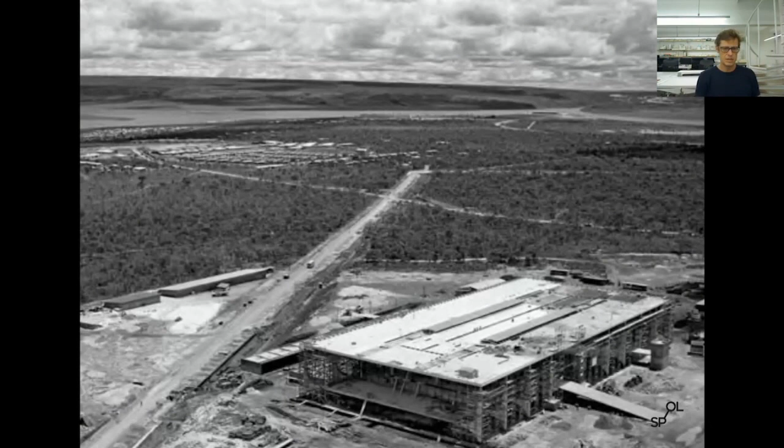Here we see an example of Brazilian architecture, by Oscar Niemeyer. This is Brazil, this vast plain with singular objects signaling in the plain, with very little connective tissue between them. Really beautiful, fantastic objects, world known, but that creates this problem: the dream of Brazilian architecture is exactly this, and everybody expects the architect to design architecture in one night, just like Oscar Niemeyer did. So Brazilian architects have very little time to work and design, because they're used to architecture being produced overnight.

It's kind of non-stop. But I believe if we zoom out a little bit, we see that in the long perspective, Brazil is growing, Brazil is getting better. But day to day is really stressful. We have to, as architects and urban planners, take a bigger picture, a longer perspective on this.

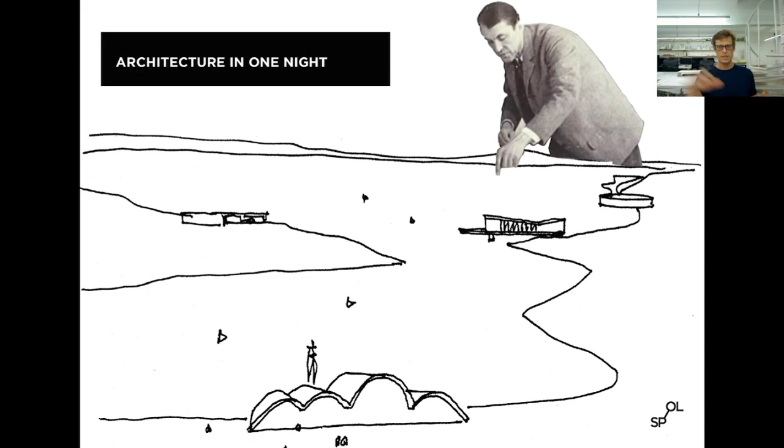Brazil used to be at the forefront of modernism, with fantastic projects by Lina Bo Bardi. But there's this problem - these are the projects that Oscar Niemeyer designed. This is his first commission, which he designed in Pampulha, where basically the mayor of Belo Horizonte called him and asked him to design these things, but said he had to present it the next day. So he went back to his hotel room and drew all night, and presented the next day this famous building, which afterward led him to design Brazil's capital, because of this. So this was really the groundstone of Brazilian architecture - architecture is something you do in one night.

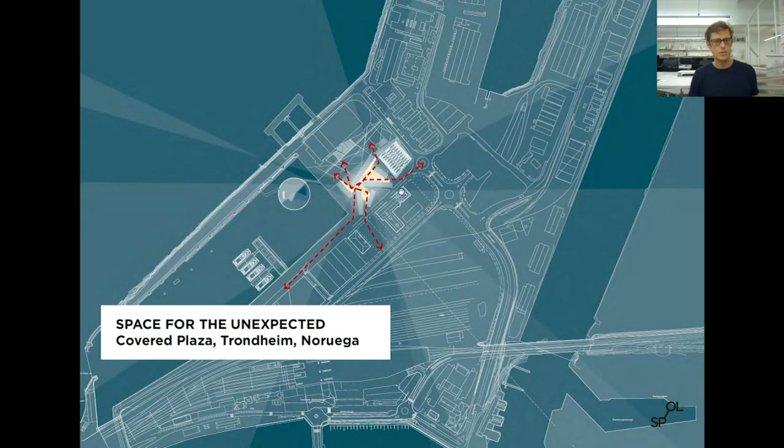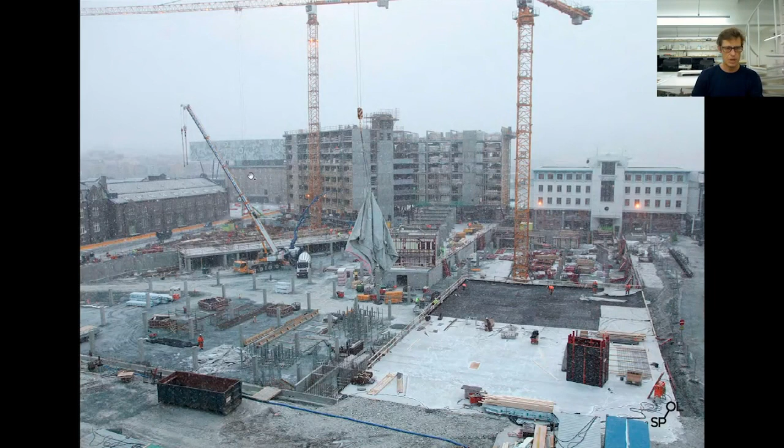It's extremely cold, so what we did is we made this big covered space by breaking up the hotel. We made a big covered space which, in this harsh winter, people can walk through to use. Even though it's a private space inside the hotel, they can use this as part of the route in the city. It becomes a public space paid for by private money. Here's an image of the hotel, referencing the Lina Bo Bardi bridges from the Sesc Pompeia here in Sao Paulo. But you see basically this covered space is working as a plaza in the city.

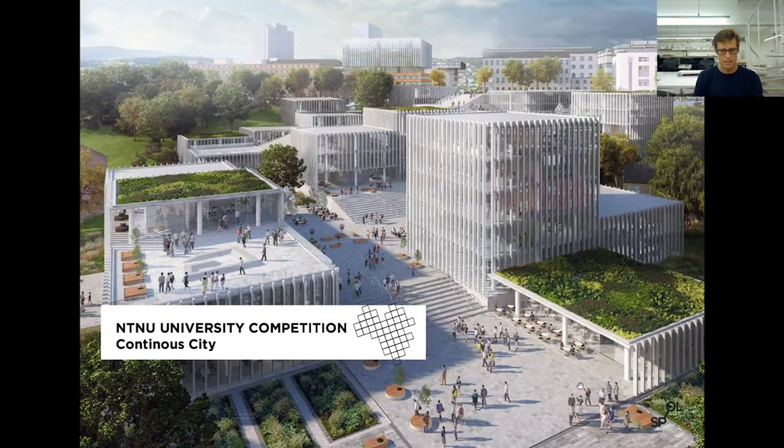The university campus here, also in Trondheim — the idea is that the university campus becomes a tissue, so instead of being a building, it becomes a series of public spaces that connects the top part of the city to the lower part. So instead of being just a private university building, you can actually invite the entire city to pass through the university and use this building as part of the circulation in the city.

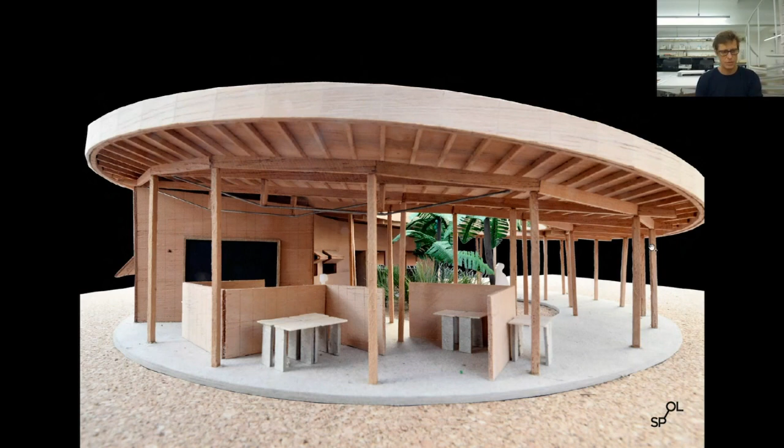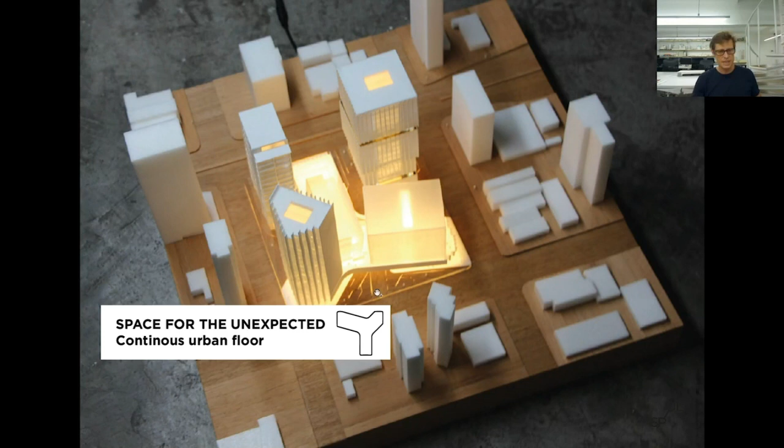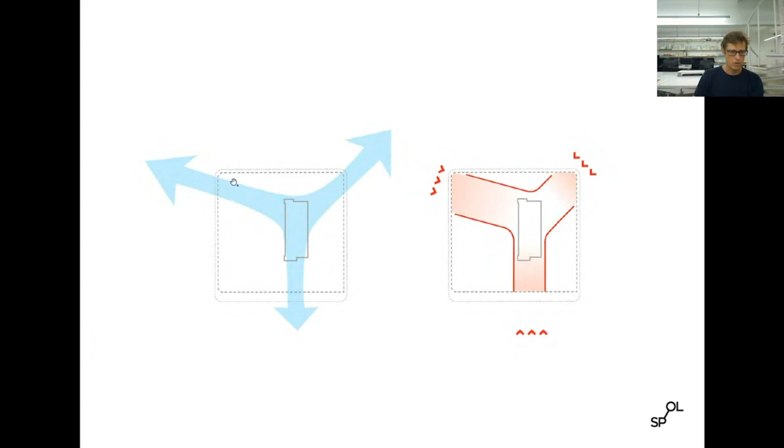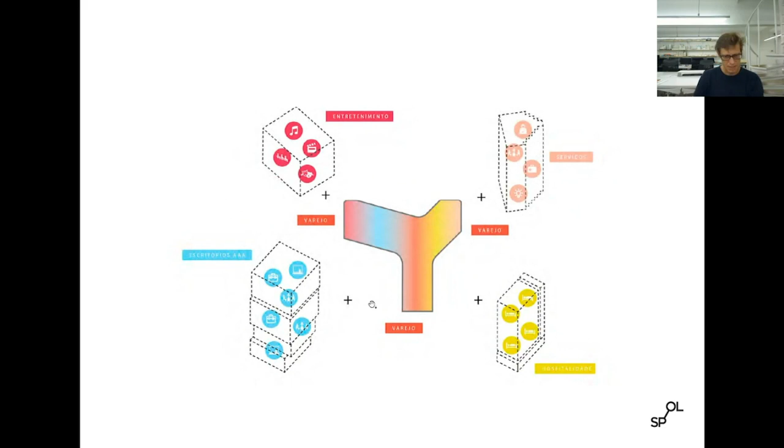Here's the model, and here's the school under construction. And here in Sao Paulo, it's an entire city block where we're suggesting a mixed-use, private development. Instead of making a closed-off development, we're bringing the public space in through this building, connecting all the corners of the city block, making these fronts. We have this urban organizer in the middle and green plazas around it, where we place the buildings. The result is a continuous ground floor with green space where people can walk and connect through the city, with commercial developments on top.

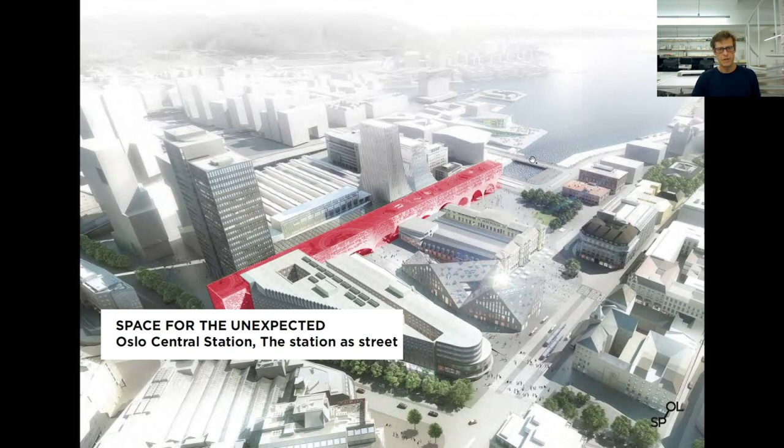Oslo Central Station, it's the same idea. It's a competition for the station, and the idea is how can we turn the station into a street. This is the main station building, but it's also the street connecting the old part of the city to the new part, a station boulevard that cuts through everything. So more than being a station, the central station becomes this connective tissue, a street in the middle of the city that connects the city.

Here are some models from the process, and here's an image of this new street, the station as a street.

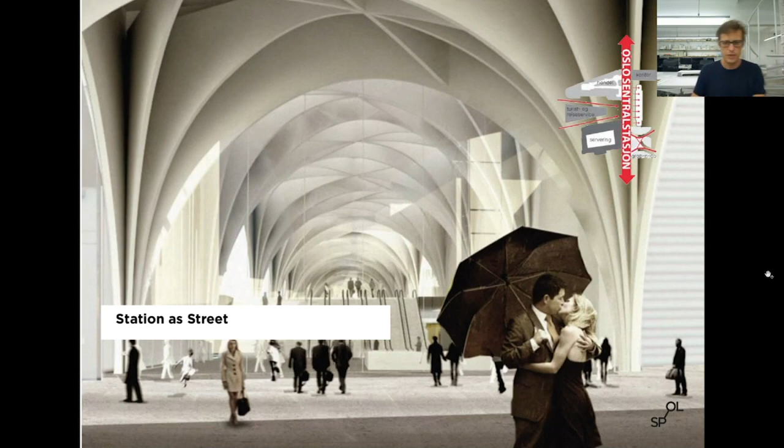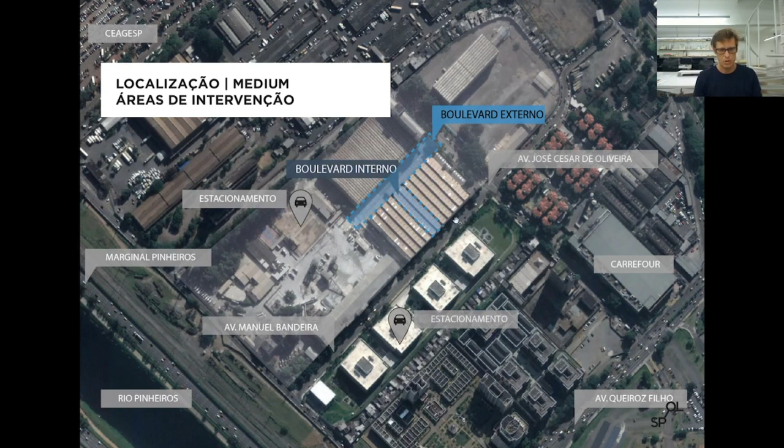Reinventing State is a project here in Sao Paulo where we worked with the client on the outskirts of Sao Paulo, these big warehouses. The client was saying, what are we going to do with them, we should demolish them. We said no, you have to keep these fantastic old structures. So we made one of the biggest co-workings probably in the world here in this warehouse.

This is the warehouse, and you see we pasted an entire city block inside it. So inside this warehouse fits an entire city block. We realized we have one floor of 15,000 square meters—an office space that big means 5,000 people are going to be working here. That's a small city in Denmark, where I'm from. So you have to imagine one floor office with the population of a small city. It moved from being an office to actually being urban.

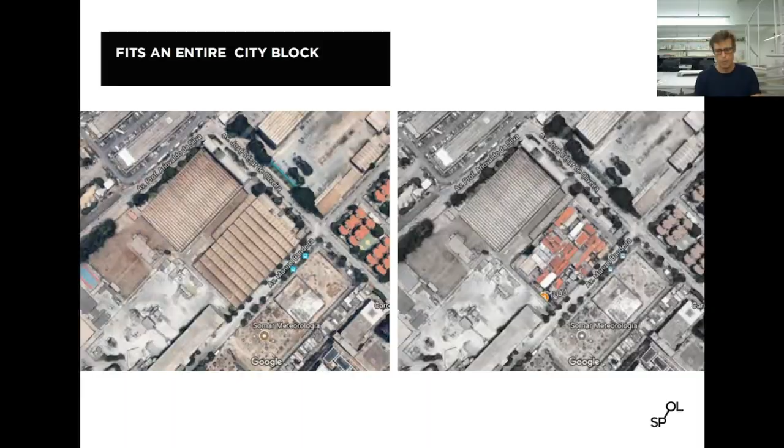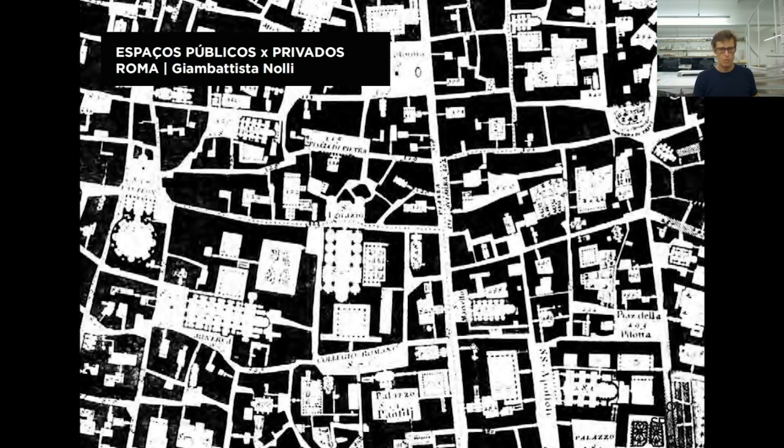It's this big co-working, 15,000 square meters—what is the minimum thing you need? And then how can we turn the office from being an office into being a city, and instead of being a virtual Tinder, actually being a physical Tinder. You go there and it becomes this kind of machine for meeting people—you don't need to be dating, but to meet people.

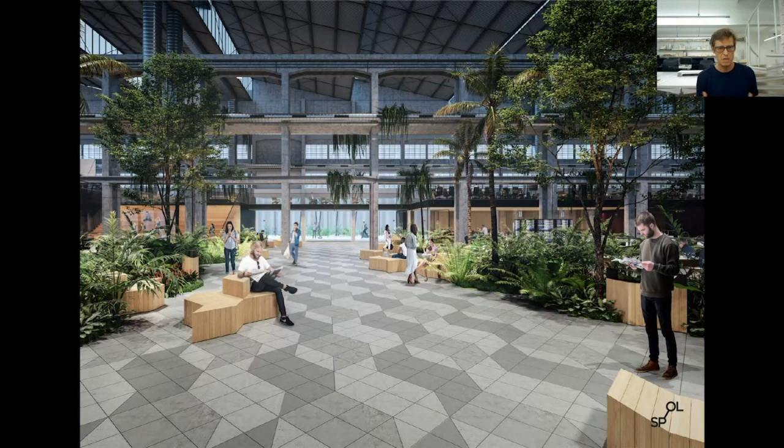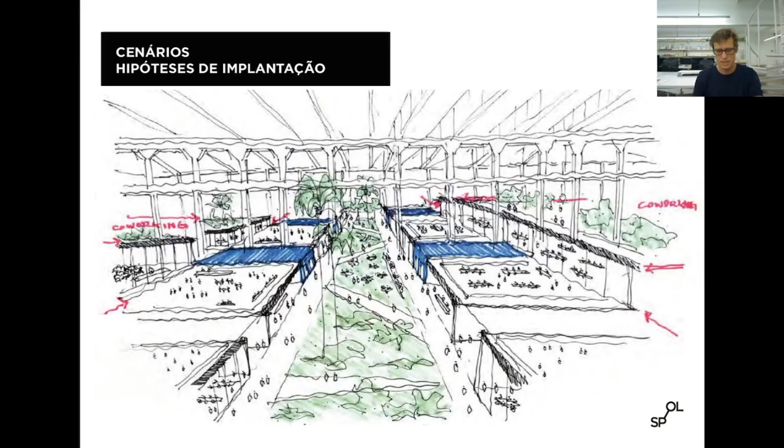So what we did is that we made this big public space in the middle of the office space. This is a plaza, a public plaza from one end of the building to the other. If you don't work here, you can actually walk through this plaza, and it has these trees, this nature inside. So this is the idea of this continuous public space.

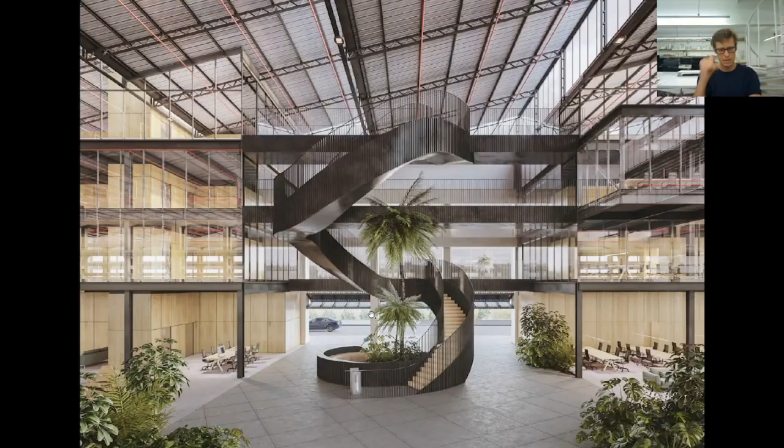Here's some more images of this space in between, and then back to Sao Paulo. So as I told you, the risk of Sao Paulo is that it turns into these singular towers, where developers buy up lots of old buildings, demolish them and make a tower, buy up the next piece of land, demolish the existing building and make a tower. So we're working on this project called the Largo Batata.

So it's a huge public space. It's really important for the city because it's where you meet, the civic space where you make demonstrations, and it's what's lacking in Sao Paulo. It's one of the few public spaces in the city. So we ask ourselves, what kind of city do you want?

So the Largo Batata is here, and our client basically asked us to help them make a master plan for a big part of this area. Our client is a private developer, so they don't work with the city, and we don't control any of the public space whatsoever, but we can control the private space, the private development. So how do we do that?

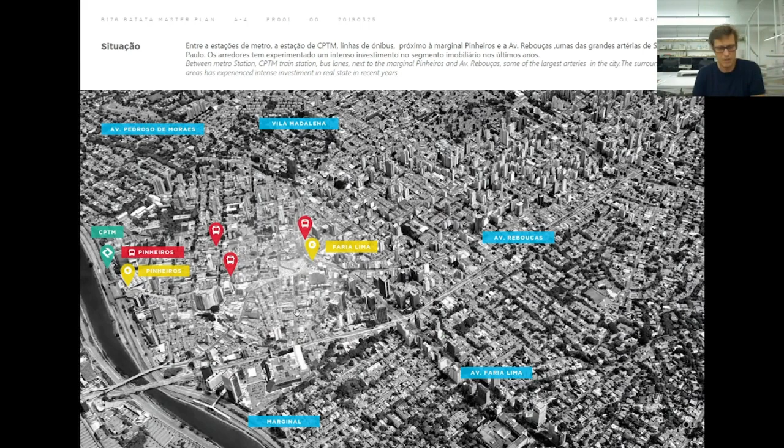You see, it's almost in the eye of the storm between the main CBD district, the main artistic district, lots of high-rise buildings here, and here in the middle where we're working, there is almost nothing. Nothing has happened for several years. So it's kind of the silence in the eye of the storm.

This is the plaza, you see the buildings around. This place is actually hugely successful, and lots of people go here. It's full of restaurants, full of bars, full of small shops. So it's a really bustling part of the city, and our client is investing here, buying up pieces of land.

And as every good developer, what they would do is buy up all this piece of land here, demolish all these buildings, and make a big tower here. And we told them, you have to keep these existing qualities, this existing fabric, because why is it that everybody in Sao Paulo wants to go to Largo Batata? It's because it's full of restaurants, bars, shops, galleries, lots of people meeting here, and that's because of the quality of the street front of these buildings.

So if you demolish these buildings and make a tower, you also kill these fantastic qualities with what you're trying to invest in. So we made a master plan together with them to see how we can keep all this existing fabric but combine it with these kinds of towers. I mean, how can we insert more density without destroying the historic city?

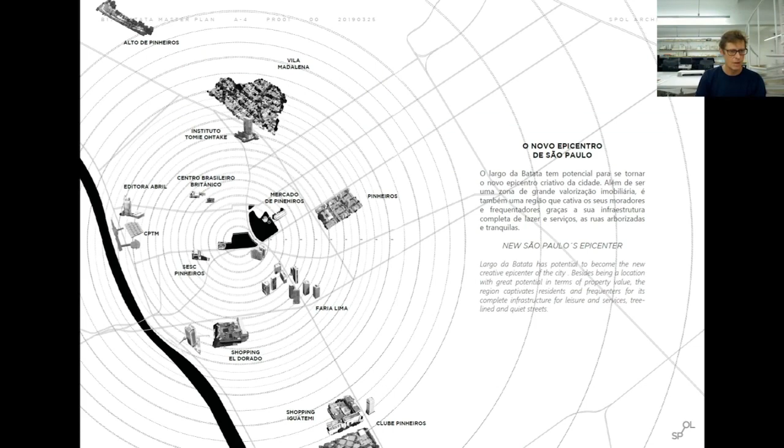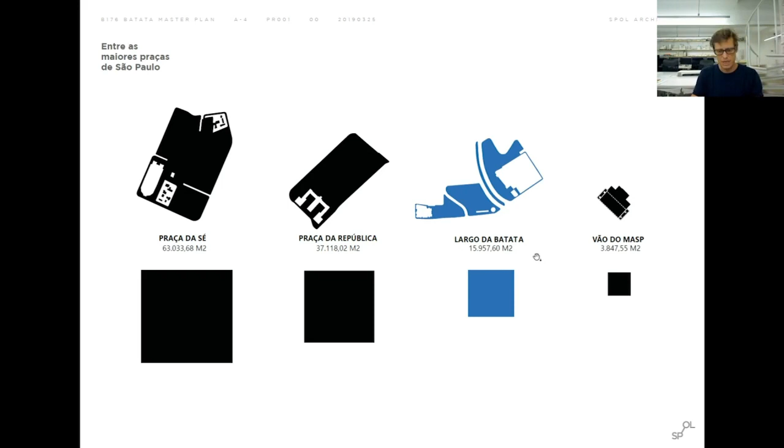So you see here, this is really the new center of Sao Paulo, Pinheiros, you see everything here. Largo Batata, the plaza, is one of the biggest plazas in the city. Praça da Sé, the main plaza in the center, Praça da República, and then the covered space under the MASP Museum from Lina Bo Bardi.

So you see, it's really a big space in the city, which is this space that we see here. So it's interesting. We have all this fabric here, which is the historic fabric of the city, and then we have Faria Lima here, which is the main business street of the city, which is what you see here.

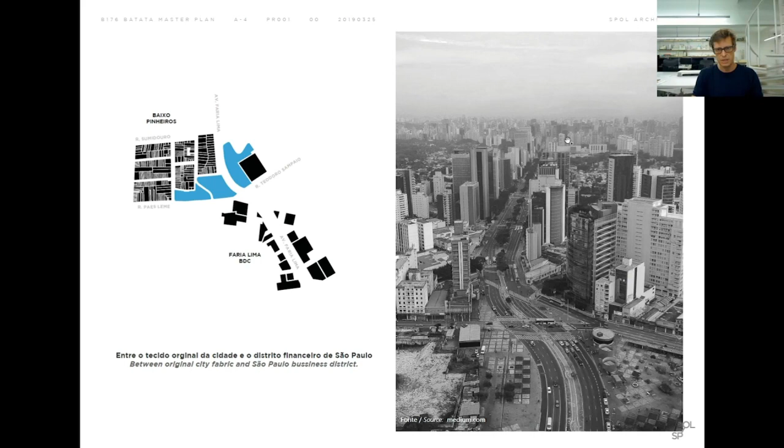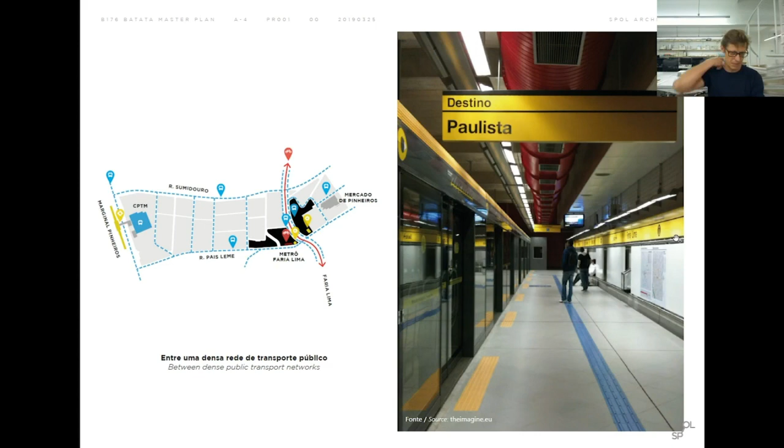So our project is here. It has all these low rises, nothing happened, and then you see all the business towers here, the AAA towers here. So it's super close. It has a metro, which is a kind of unique quality in Sao Paulo. It's a metro that works very well, but is not very extensive.

So our question is, how can we keep these qualities, keep this transformation? How can we make a product that doesn't kill all these qualities? So the question is, what happens?

Then there's a thing called Operação Faria Lima, which is a law that says if you join small plots to a minimum of 1,000 square meters, you can build 4 times — you can give a FAR of 4 times your plot.

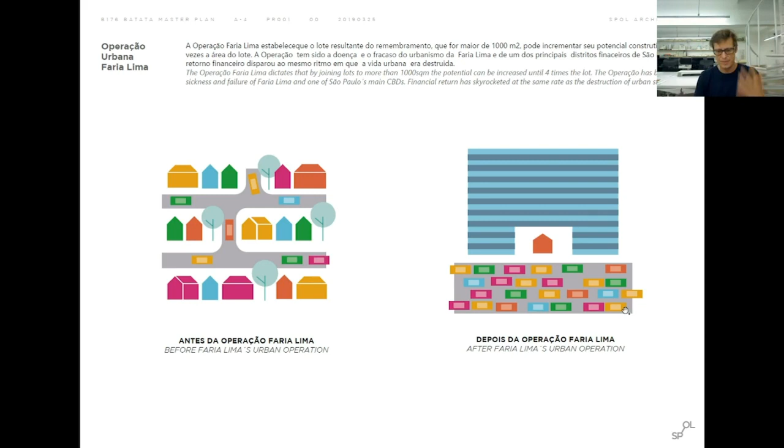Which means that basically what happens in Faria Lima is that everybody buys up the land, breaks down the building, and builds these huge enormous buildings, which kills all urban life and turns it into big boulevards full of cars. So it's exactly what we don't want for a great city, right?

So basically before and after, if business as usual means that you buy this up, you demolish it and you do this, it's kind of detrimental to the public spaces — like the headquarters of Google in Sao Paulo.

So, urban revolution — Sao Paulo is experiencing a new urban revolution in terms of mobility. Bikes are a new thing in Sao Paulo, bike lanes are a new thing in Sao Paulo, the metro is being expanded, and lots of people are obviously using scooters.

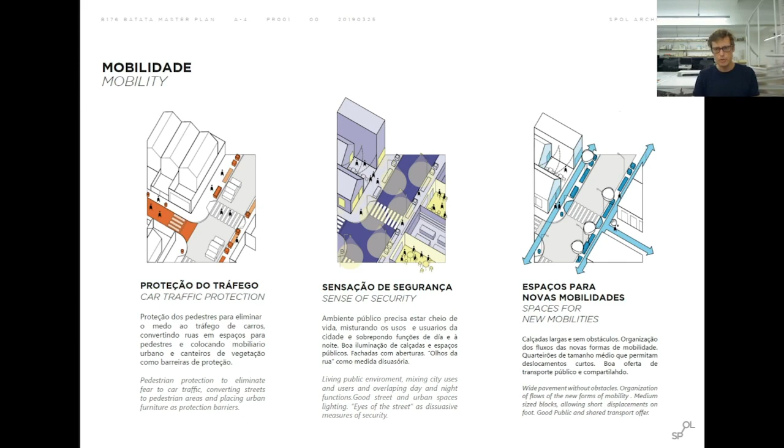So how do you make a good city? We work together with the client to help them understand what guarantees the city: protection from cars, diminishing the amount of cars, security, short distances between entries, good lights, mixed use so you have life 24 hours, space for new mobilities, shortcuts for people to walk and for bicycles, which isn't usually considered in the city.

So, public spaces — how we can make public space. As I said, we only work in the private sphere here, so we need to understand how we can insert public space inside private investment.

Climate comfort, of course. Largo da Batata is one of the hottest places in Sao Paulo because there's so much asphalt and so little green that, if you measure the temperature, it's really the hottest place in the city. So it's very important to create shadows and protection against the rain as well, the heavy rains of Sao Paulo.

Places to stay in the public space, furniture that you can use, and experiences — protection from the noise so you can actually experience things and hear what other people are saying.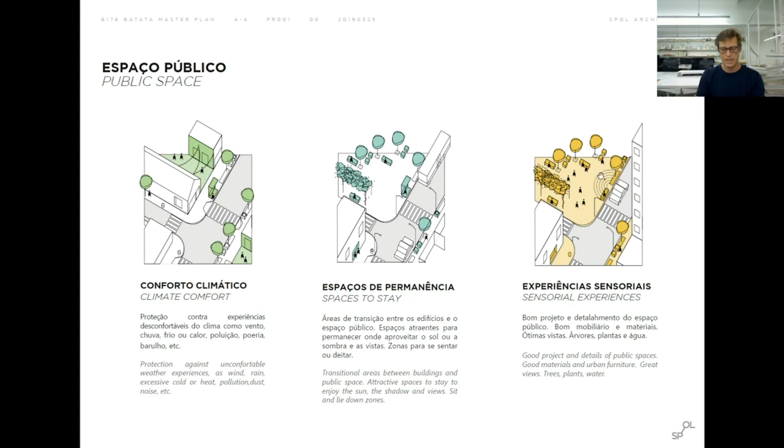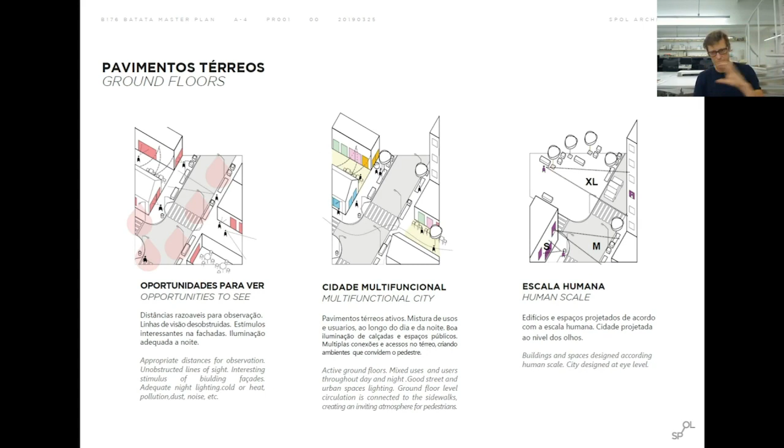Continue with these active ground floors. Short distances, a multifunctional city, lots of programs instead of these monofunctional towers with a wall around them. And then, the scale of the human body — keep this small thing that attracts people there.

So what is the urban transformation, right? This is what we have today, this is why it's hugely popular, the prices are going up. This is what the developers want, because they need to make their money back.

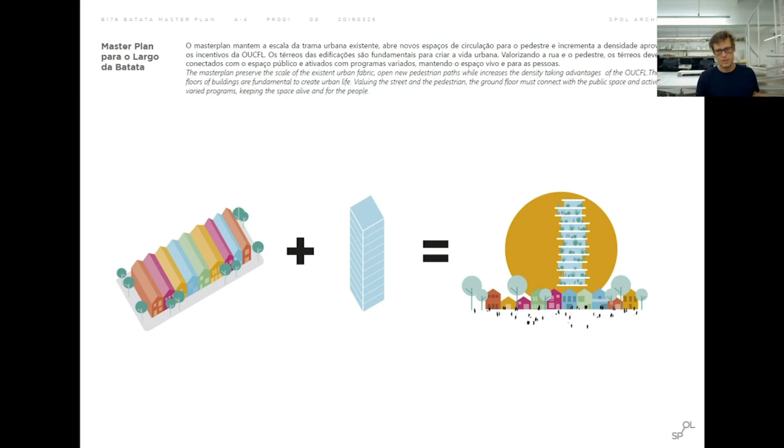So how do we do that? That plus that gives this. So this is really the project: how to keep the existing fabric and insert more density in order to bring more life down to the street, to put more people living there.

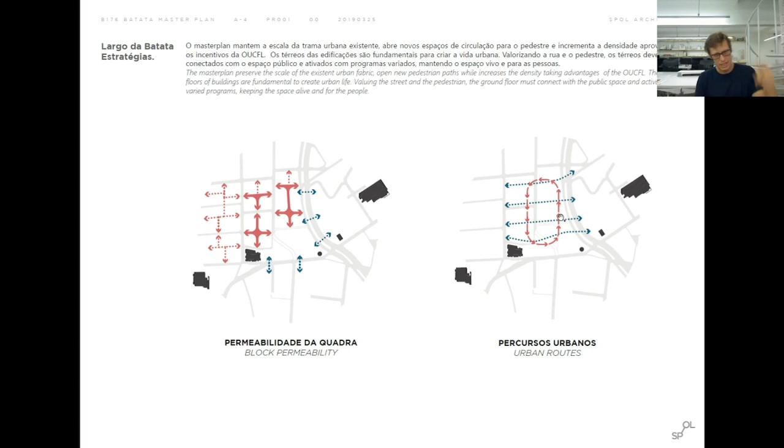So how do we do that? We take these blocks, because as I said, we don't control the public space, we control only private blocks, and not every property in a private block, obviously, because not everyone wants to sell or be part of the project. So we make these internal routes inside the blocks, and bigger routes that connect these loops that go through the blocks. So you see here, this is the project — the multifunctional city.

So the idea is to make mixed-use towers, not monofunctional towers — a residential tower, an office tower — where people have to go down. If you make an office tower, there's no canteen, nothing in your tower, it's on the ground floor. If you make a residential tower, there's no gym, no pool, nothing in your tower — you have to go down and use the city. So the idea is to design everything together.

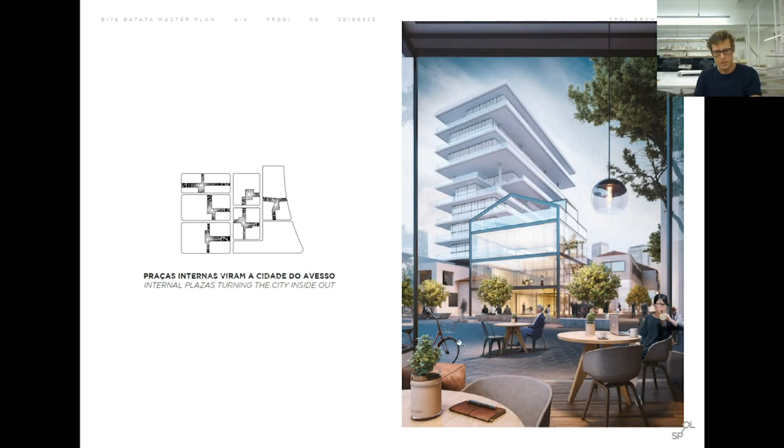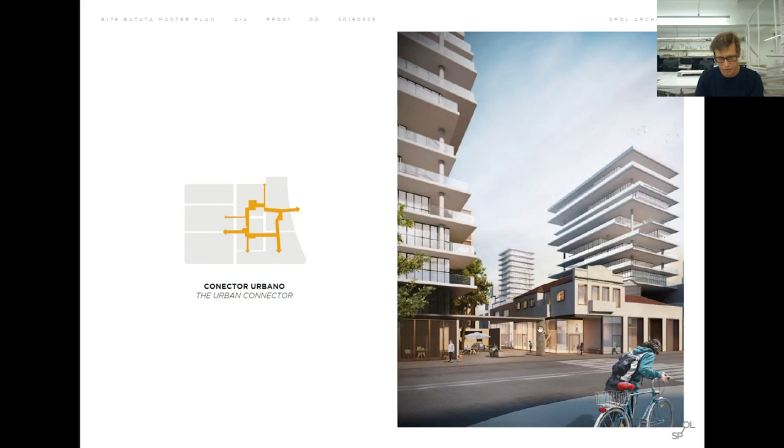So here you see these internal loops, and some of these internal plazas that we create by demolishing pieces and putting new towers, liberating space inside, and making these shortcuts. This is an actual design of the shortcuts through the city blocks, where you keep the existing buildings and insert new towers with a private-public street that cuts through.

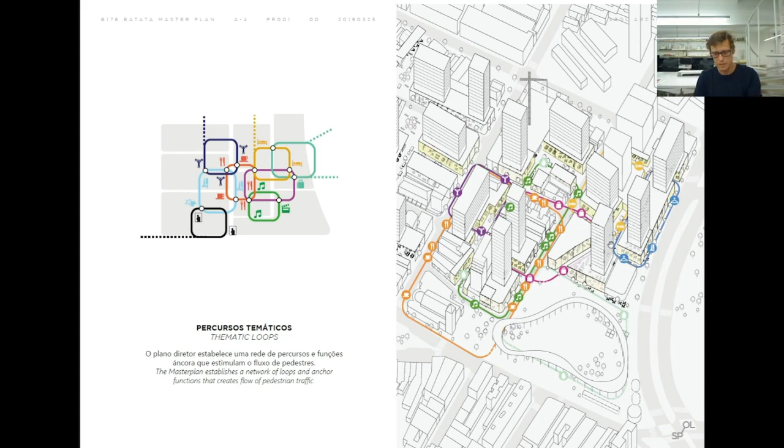So these are the loops inside. How do you make these loops? The existing buildings combined with the new towers. And this is what I said—instead of making singular-use development, it's really mixed-use developments that we see here.

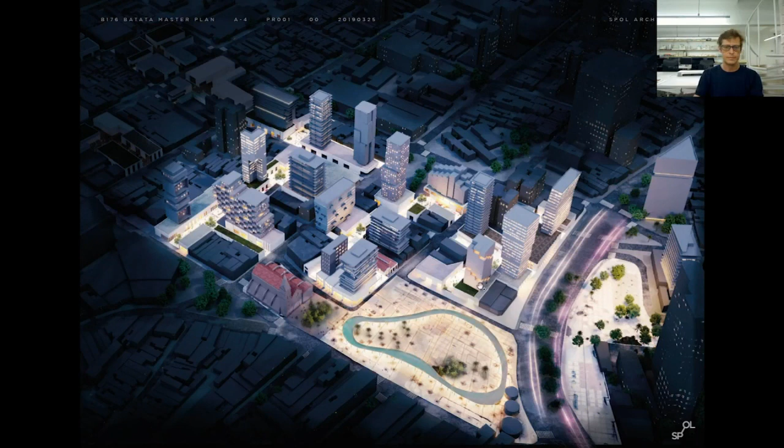And then there are these different routes—the gastronomic route, the nightlife route, the retail route, the fitness route—that really bring people together inside. So how do you do that?

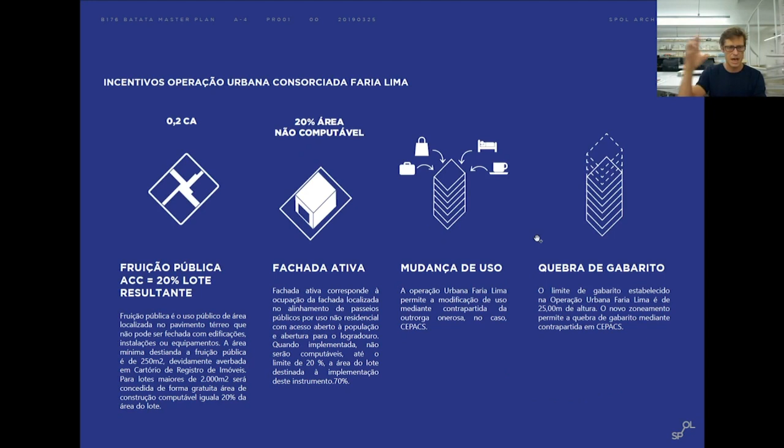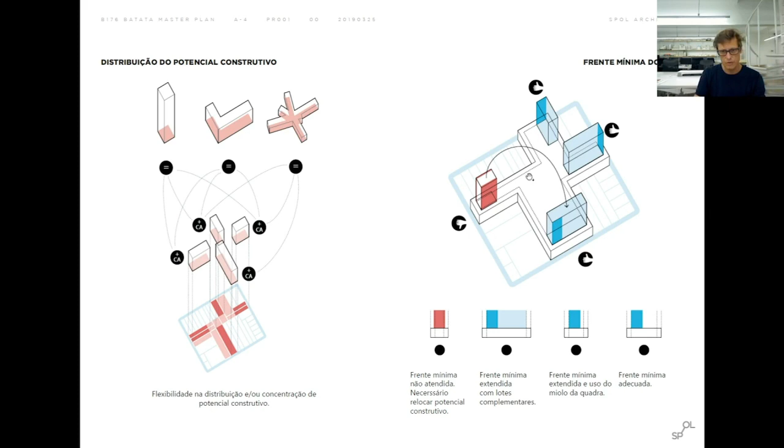I won't go into the details of how to make a plan like this in Sao Paulo, but it's of course very much working with the law, understanding the setbacks, the heights, all the incentives we have to do. How do you take density that could be placed elsewhere and place it in towers in order to liberate your ground floor and make these public spaces in the middle of the city block.

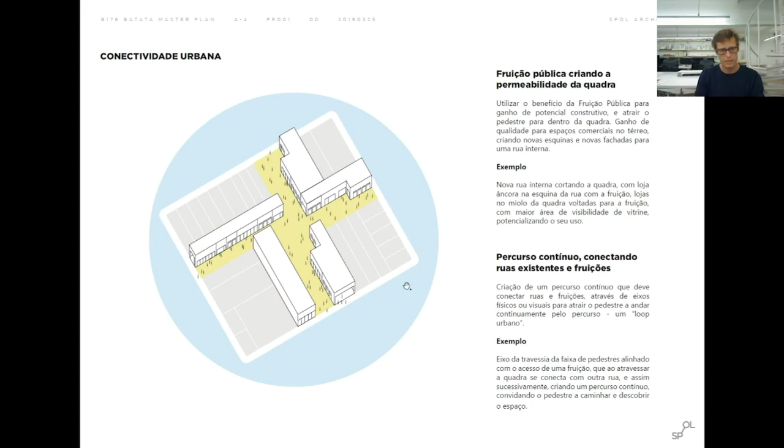The fachada ativa, the street fronts, how you cut through here to make public and private connections, and what you gain from that in terms of the programming of the spaces—the public spaces in the middle. So you make this multifunctional city with these internal plazas.

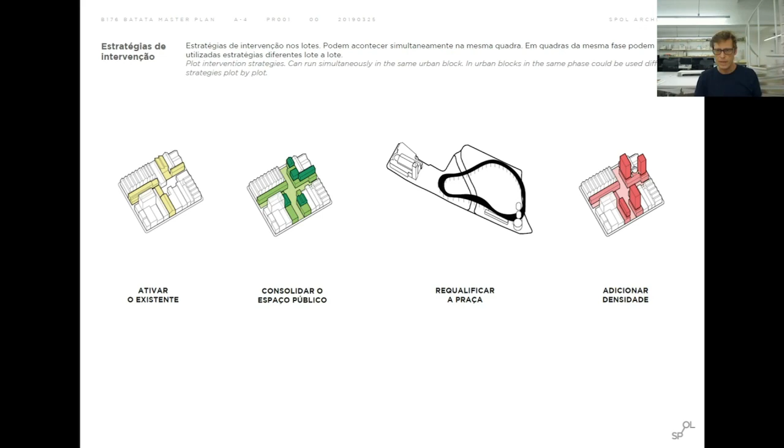So how do you do that? The timeline in order to do that. This is where we are now: activate the existing buildings—that's what's happening. Then the next thing is to start consolidating public space, demolishing the less desirable buildings to make the connections, and then donate a project to the city to reinvigorate the entire plaza, and in the last project add these additional densities, these additional towers. And then we have a video showing how you do that.

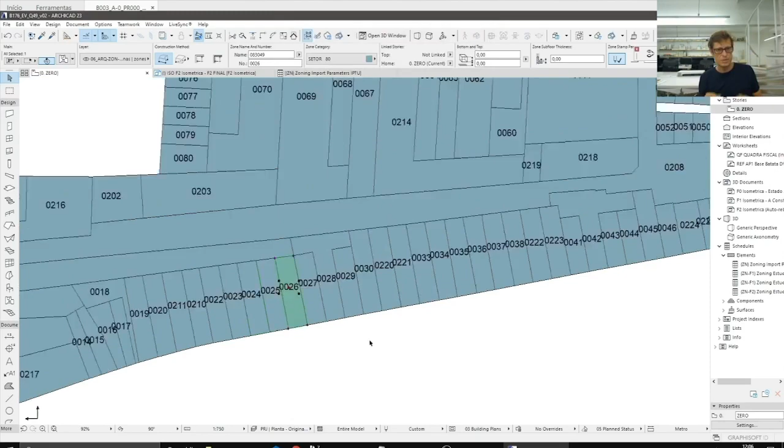Because obviously, in order to do this, we have to work with entire city blocks, which is quite complex to understand—which buildings to keep, which ones to demolish. There doesn't exist a good city map of this. So what we did, we made a script where we used Grasshopper and ArchiCAD and different programs to generate it.

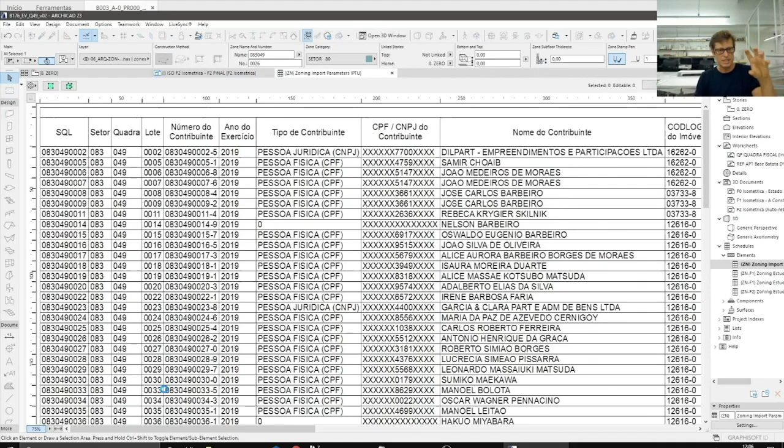What we did here is take the map of the city and the property tax information, and merge that together in a script. So here we can see the sizes of each property, and we turn that into a map based on the script. This is the map, and then we can put in the different uses, the zonings, and we see that what we get out of this is basically a map that shows us exactly how it is.

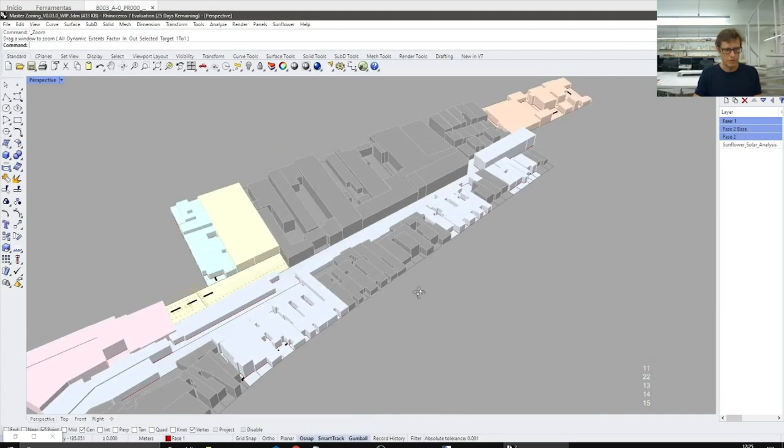So based on the property tax information and the city map, which only has the outlines, we can actually make a 3D model. This is generated purely from the script, so nobody drew this—it comes from the script, this 3D model of the existing condition.

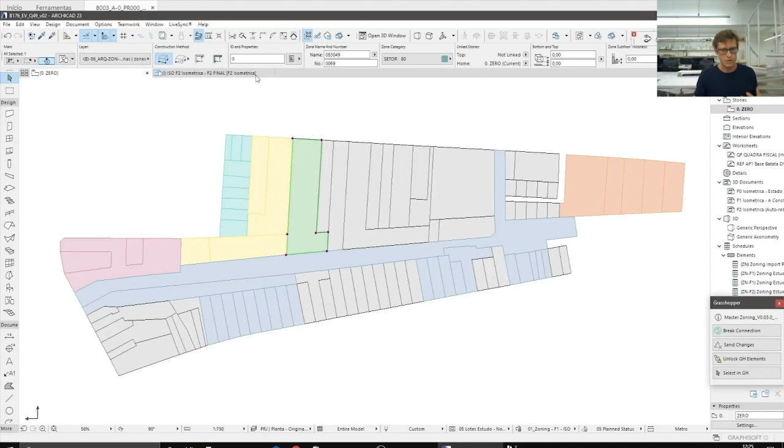And then we can start using this script to join together the plots, because we obviously cannot buy everything, but you might be able to buy these ones. And then understand what can you keep here, what can you build here, how much fits, which ones are useful to buy, which ones are not. It's like endless possibilities, endless combinations.

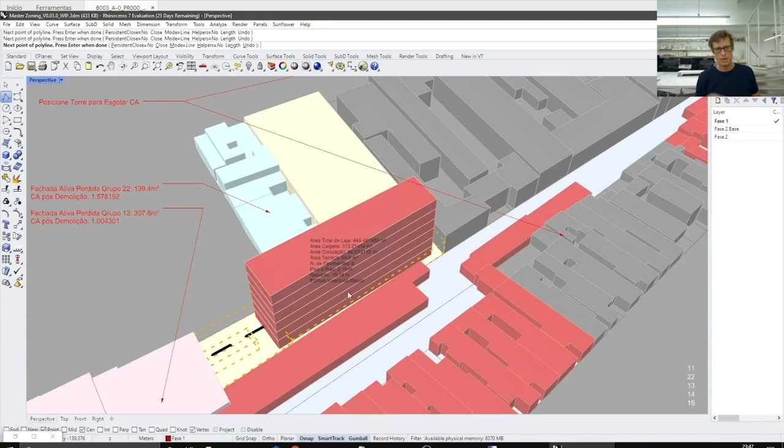So we made this script that generates all this analysis for us and gives us the output—the economic output, the square meter output—and also tells us about the restrictions: the setback from the streets, the maximum height, the permeable area, the heritage listed buildings, and the setbacks from the heritage listed buildings. It's all in this program, and it comes straight out of this city map.

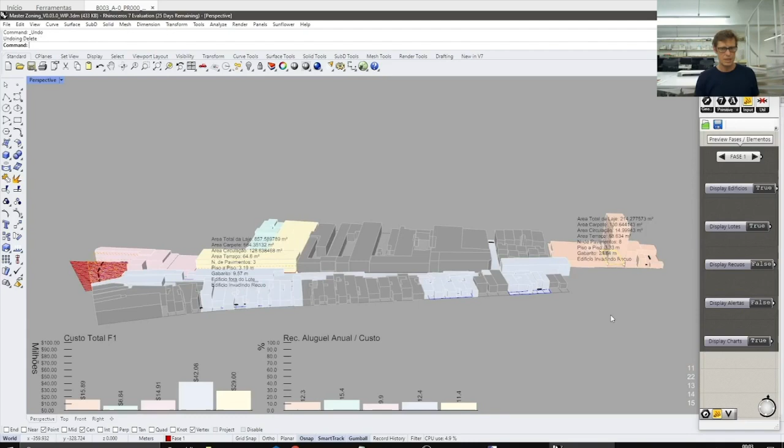So basically, with this script we made, we can apply this to every lot in the city of Sao Paulo and immediately get a 3D model and immediately see the potential. We can put in the cost of construction, the rents, the sales prices, and start tweaking it—saying, well, here at the plaza the rent is higher, further from the plaza it's lower—and we get these 3D models.

Of course, we still need architectural intelligence or finesse to turn this into architecture, but it's a very good analytic tool that allows us very fast to analyze all these properties and make different scenarios, because what we need here really is to work together with our client to find the perfect scenario.

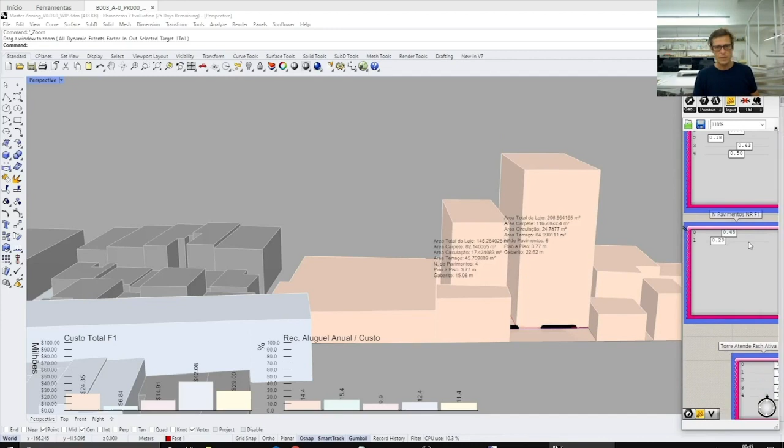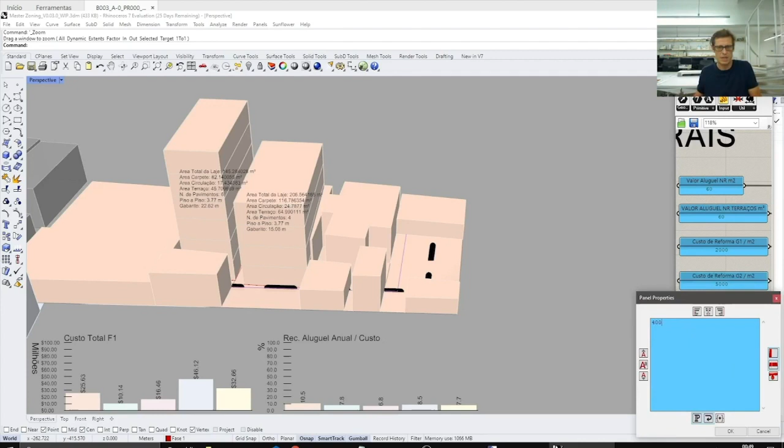So here you see we can change the densities, the floor heights, the size of the floor plans, looking at how many lifts you need, what is the cost, and then we can start looking at the return of investment, because in the end, as I said, it's a private client, there's no public money here. So we need to prove to them that instead of demolishing everything and building new towers, this is a better strategy. We need to prove to them that they will benefit economically from keeping these existing fabrics and adding these new towers. So here we put in the numbers and really start optimizing it for the cost of construction, again.

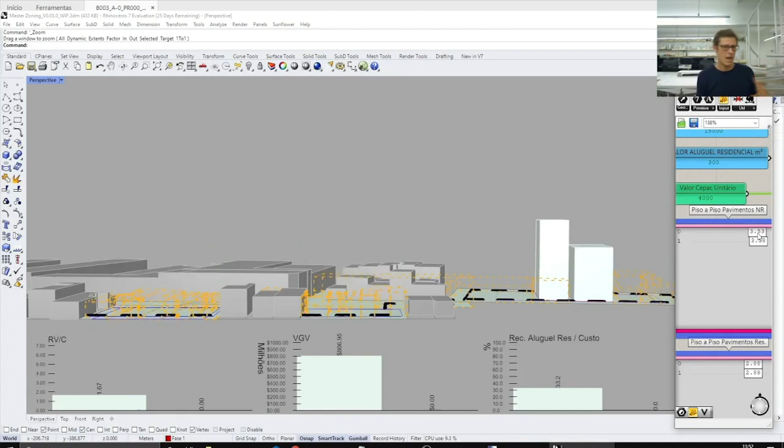So the script does all these things, and then if our client calls us tomorrow and says, this property here I cannot buy it, or we need this property, then the script immediately runs these new scenarios for us. So it's a much faster process, which allows us to have intelligence about which is the right solution.

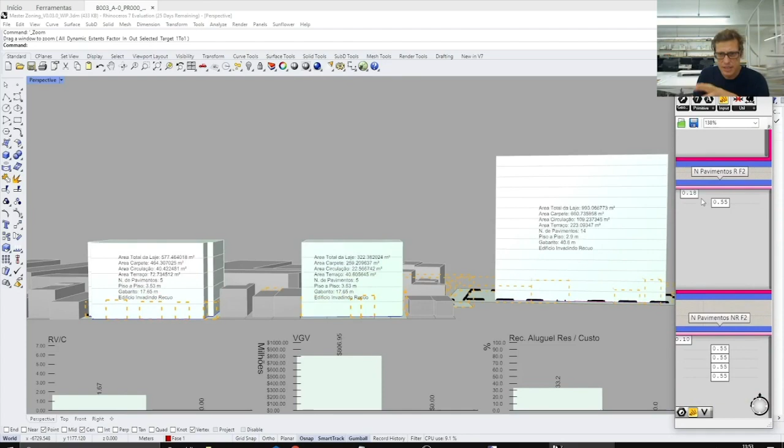And these are the terraces, the number of floors that we put in here. You see the number of floors in the different lots, and then this changes obviously the size of the towers and also the output. It changes the phasing of the construction.

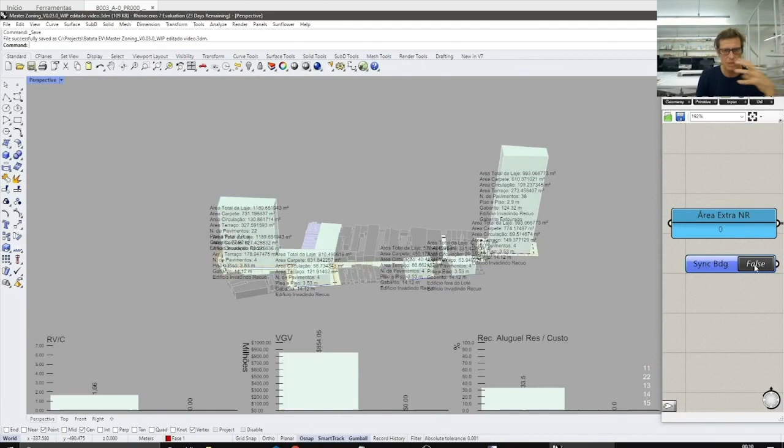And then when we finalize all this, we can export it into an ArchiCAD model that allows us to actually start working on design. So here it's optimizing for the ArchiCAD output, controlling the things, controlling the layers, and then it becomes this 3D model that can be directly used by the architects to actually develop the projects, which we're going to see some examples of here.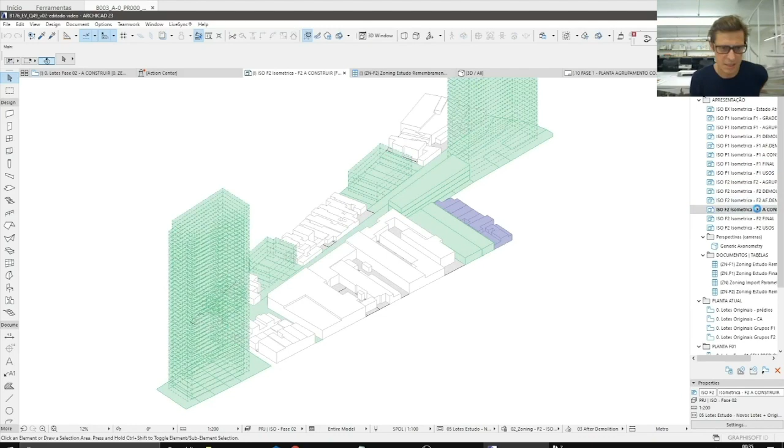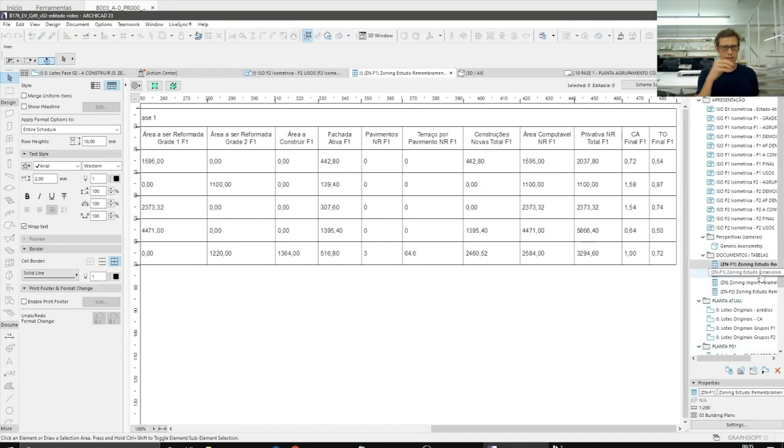Turns it into towers. This is still before the designs. Checking all the parameters that they actually work, every building, number of floors, how much is demolished, how much is constructed, what's the cost of demolition, what's the cost of refurbishment. All this information is in there, so it immediately gives us these outputs here.

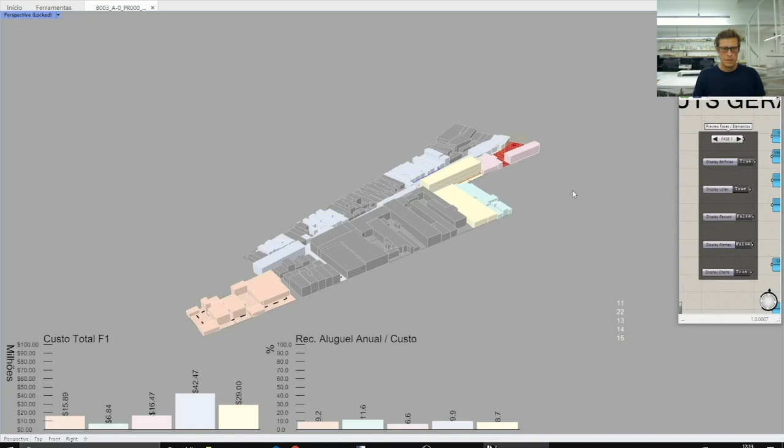Testing now for the rent and for the costs, for the sales prices, how, if the plot is the same, you can distribute your buildings differently within that same piece of land. The piece of land is all this green joined together, all these plots. So where do you put your building, where do you put your building mass? And this program then updates these models for us, which we then use afterwards to actually make the design.

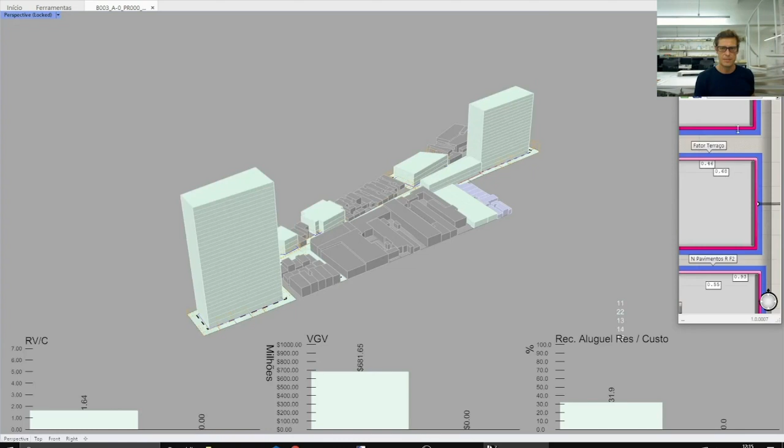Almost done here, and then I'm going to see what is the result of this fantastic script. Just tweaking the last number of floors here. So that's that, and then we just go back here and go back. So, and then this is the result, right?

Based on that script, of course, then we take it in and turn it into architecture. We start making designs, we tweak it, and we start making the connections, looking more carefully at the buildings, the existing structures, designing the towers. So these are some of the ideas of how that can turn out.

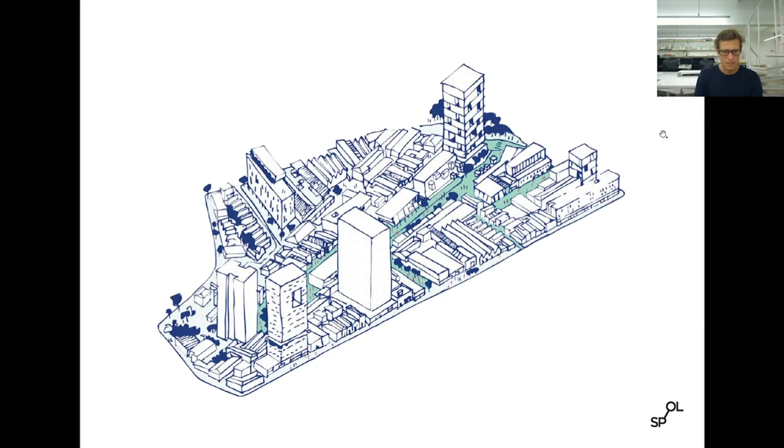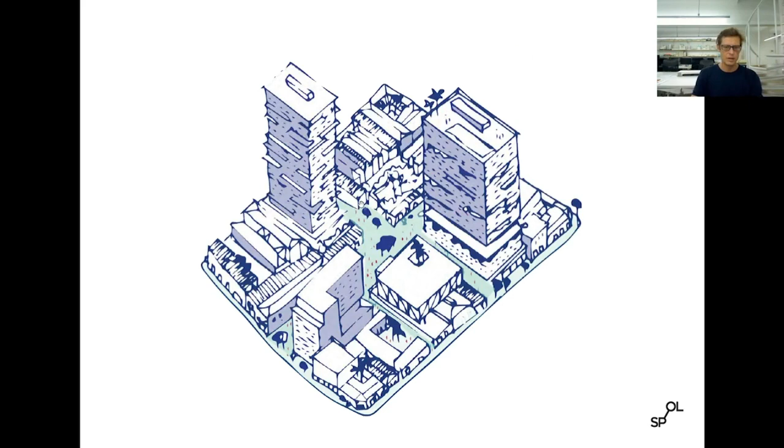Here, some existing towers behind here, and the new towers here, and the continuous public street inside the plot here, the connections, the main plaza is here connecting through here. And one of the other plots, the first one I showed here with the towers.

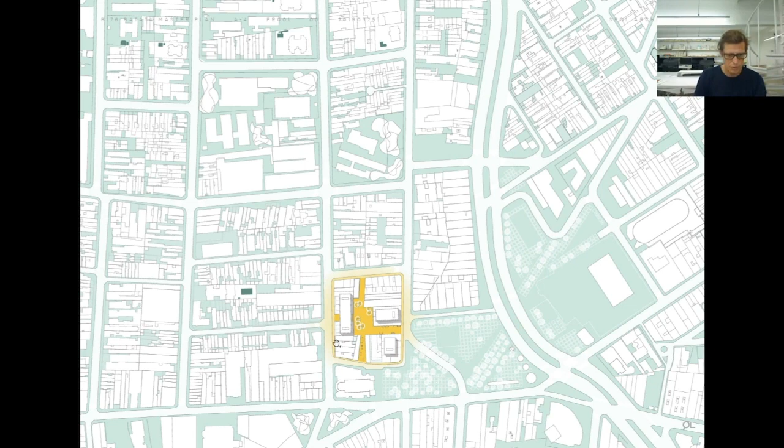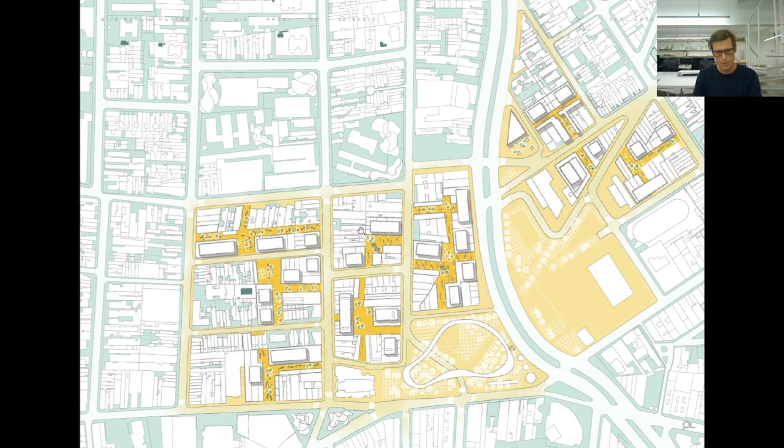So how do you do that? This is basically the phasing. So we start here, the plaza is here, this is the first project here, and then it kind of goes to the second plot, and then includes the plaza, and then in the end includes, the project can grow unlimited or limited. The success is not really dependent on the size, because already with this first project we already made these internal loops that guarantee this quality public space within the city fabric here.

Just some more ideas here, and then the plaza, it's called Largo da Batata.

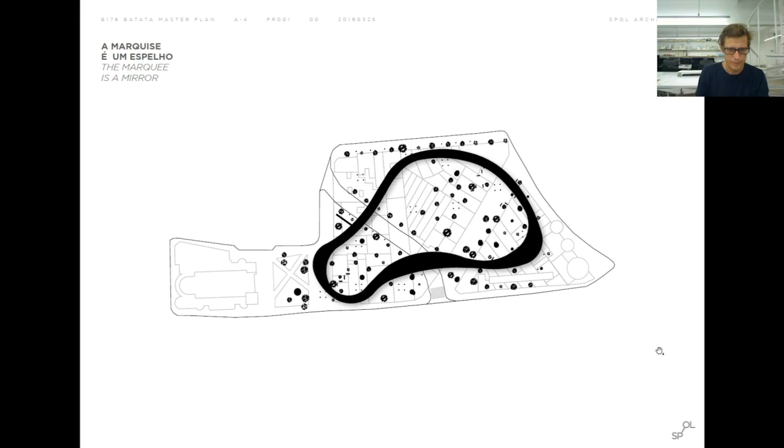Batata means potato, because they used to sell potatoes here - this was the potato market of Sao Paulo. So we are suggesting to make this canopy in the shape of a potato, which can be used for lots of different things, like film screenings. This is the final image with the potato here, the towers here, blending into the existing fabric, keeping the existing fabric with the towers on top.

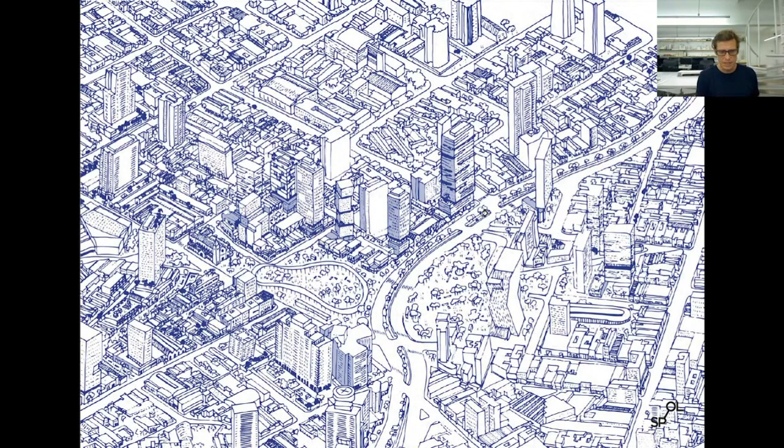I think that was the last image. Now there's one more image here. Let's see, we have a few more minutes. This is another project we're working on.

But how can we reappropriate these spaces? Because this is what Sao Paulo lacks - public spaces for the city. How can we diminish the traffic, make bike lanes, boat lanes, for walking, for promenades, and all these things. So this is kind of the future of the city.

I hope that Sao Paulo, from being this mega city with very little public space, really becomes a very pleasant city, learns a little bit from Rio de Janeiro, from the beaches, and manages to make not beaches, but public spaces, natural spaces with lots of nature in the city that will help the city. So that's what we're working on in Sao Paulo. Thank you very much. This is Spol. Thank you.